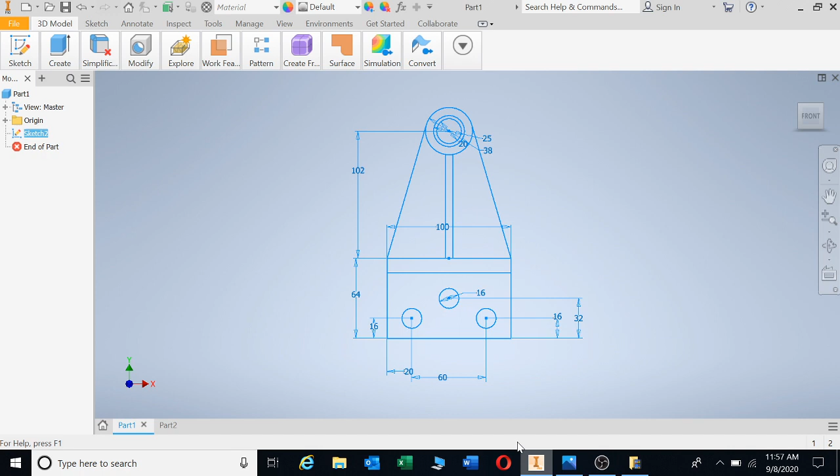The distance for it is 114, and then I need to get the gap in between there, which is 114 minus 12 and minus 12, which will be material that I put back. Okay, so let's go and do that quickly. I'm going to press E for extrude. 1 and 2. Let's get a better view, and that's the distance, and I'm saying okay.

I know I'm looking for a gap there, a U. It needs to be in the form of a U shape. So I'm going to go and share my sketch, right click. It went to the drawn sketch there, but I'm looking for share sketch here. Let's say escape, right click, share sketch, E for extrude. I'm clicking on the bottom because the top part needs to go right through.

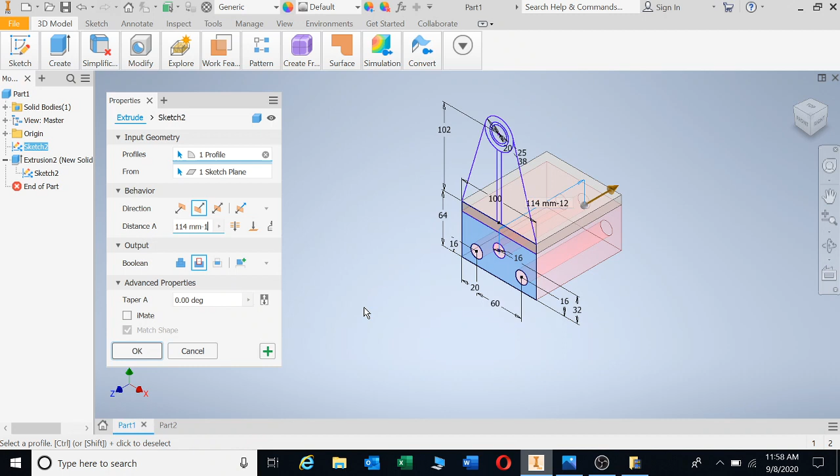So the bottom part will go in that direction 114, but I need to come back by 12 to get a one leg. So I'm just going to type in minus 12 in here, minus 12, and it will put back my leg there. Okay, E for extrude one more time, clicking on there, going in that direction. I need this time only 12, and that will put my leg in there. Okay, now that's what we have so far.

Going back to our drawing, you can see that shape was extruded 3 times. The first time we went from there to there and it gave us a solid block of 114. The second time I only extruded this rectangle there because I needed this gap here. Okay, and I can see I'm looking for a leg of 12 and a leg of 12 there. So I went out by 114.

I needed to come back by 12. So 114 minus 12 will give you a piece of leg there, and it will cut out that whole piece there. Then you press E for extrude again, and it will put this piece back here. And that's what we've done. We're going to do the very same with this. You can see these side flaps there, these side wings there.

If we go straight across, we can see that the width is 12 millimeters and 12 millimeters. There's 2 of them at the same height. The distance from there to there is the same distance from there to there. They normally match up these distances to be able to see the thickness. So you look at the heights, and then you'll see the thickness.

So the height from there to there and the height from there to there is absolutely the same, but the thickness is the same. So what I normally do, I don't mention that. I just go straight across, and you can see that is the object sticking out there. These cylinders going straight across, we've got 1 and we've got 2. Okay, but let's first focus on these 2 side wings. Okay, it's 12 millimeters each and a gap in the center.

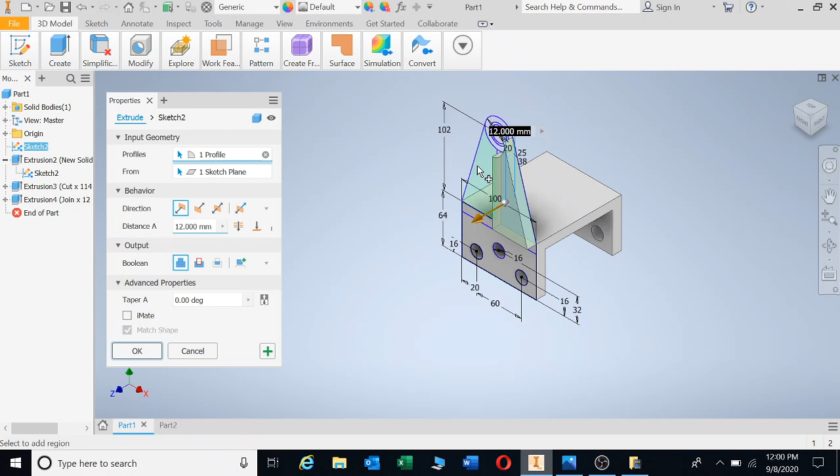So I'm going to click on extrude here, and I'm going to select the side wings. I'm going to extrude all the way from this distance to there, which will be 108 minus 20, and from this side it's 10. So it's 108 minus 20 minus 10, that is 78. So let's extrude that. E for extrude, going in that direction, and we're having 78.

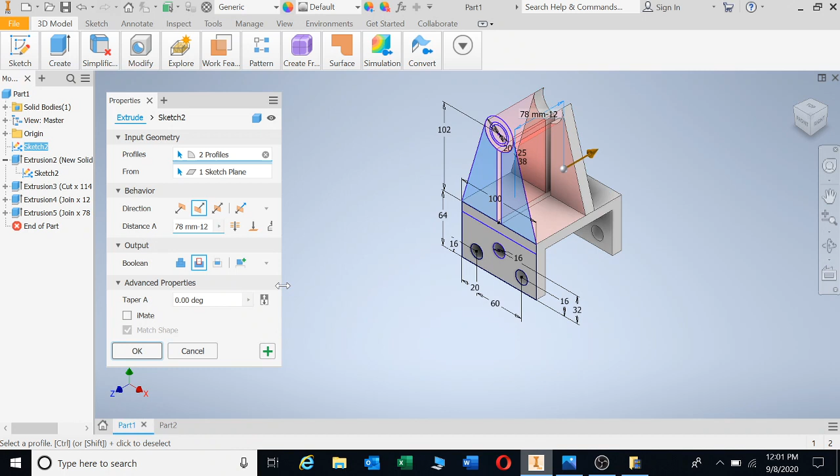Okay, if I extrude again, I need to take material back now, clicking on the very same shape, going out in that direction. I need 12 millimeters to be left, so I'm going to say minus 12, and there's my leg. Okay, again, if I extrude again, I need to put my 12 back for the front leg.

12 and in that direction and OK. I'm going to put in the rib in the middle. I'm going to go look at my drawing. This rib is actually cut there and cut there, but I'm going to put it in as a full extrusion from this point to that point. So it's 114, that's where it stops, and that's where it stops, plus 20. So it's 20 plus 114, and I'm going to put it in as a solid rectangle. I will go draw on it on the side afterwards.

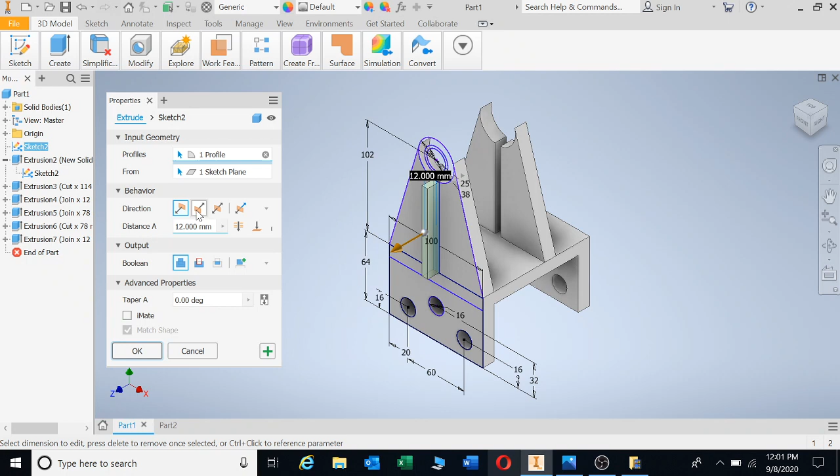If I extrude, selecting my rectangle, I first need to go in that direction of 114. Okay, and then I'm coming frontwards. If I extrude, it needs to come frontward 20 millimeters. And okay, I will draw on that later on the side. Then I am having this section here on top.

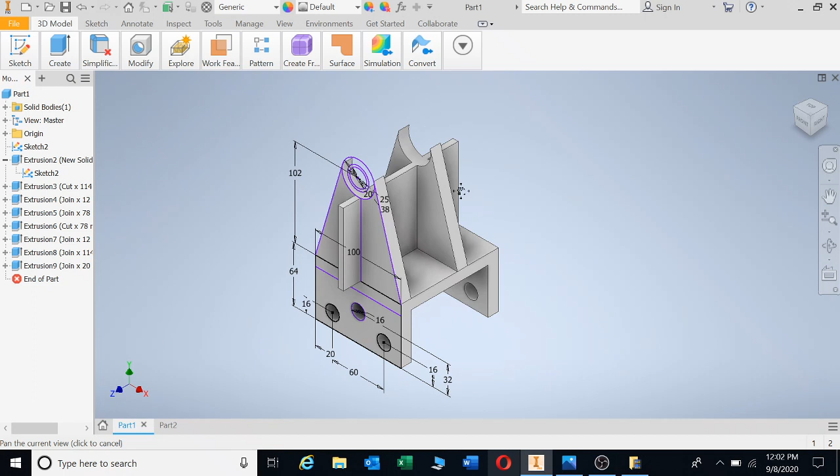I've got two cylinders. Let's look at our drawing first. We need to extrude in that direction, which is 108 minus 20, as you can see, because we're on this line here. That's where we're extruding from. So we're going in that direction. It's 108 coming back by 20, and it will give us that distance. So it's going to be a solid cylinder, and then I'm going to put 20 back.

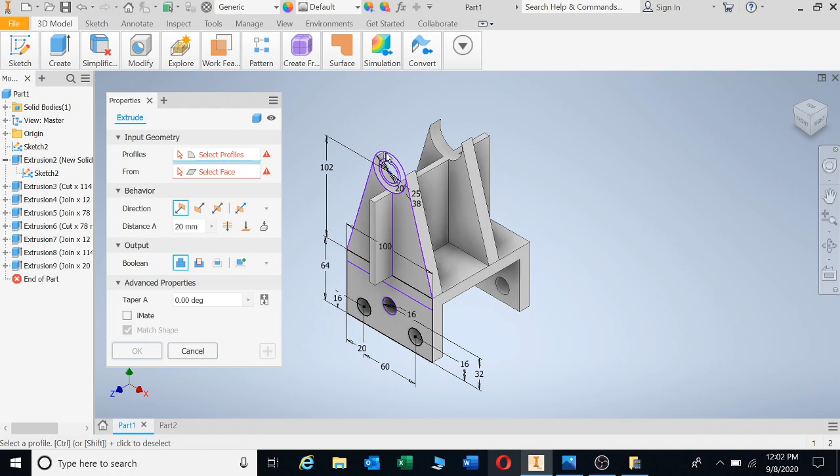If we extrude, I'm clicking on the shape there and on the inside shape, going in that direction, and I'm going to say 108 minus 20. Sorry guys, let's just look at this again. We're going out here, we're extruding from here. It's 108. We are already extruding from this point. We don't need to include 108 minus 20. We're working from this point.

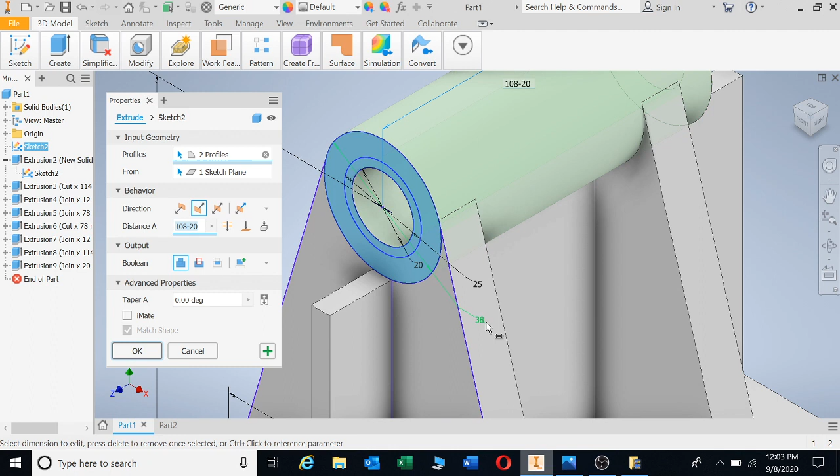So we need to go out in that direction. Yeah, that's fine. Now it's 108 minus 20. Sorry about that. I also get confused as well. So that's fine. There we have it. And that's our cylinder. And I'm going to say if we extrude, and I'm going to try to get that gap now.

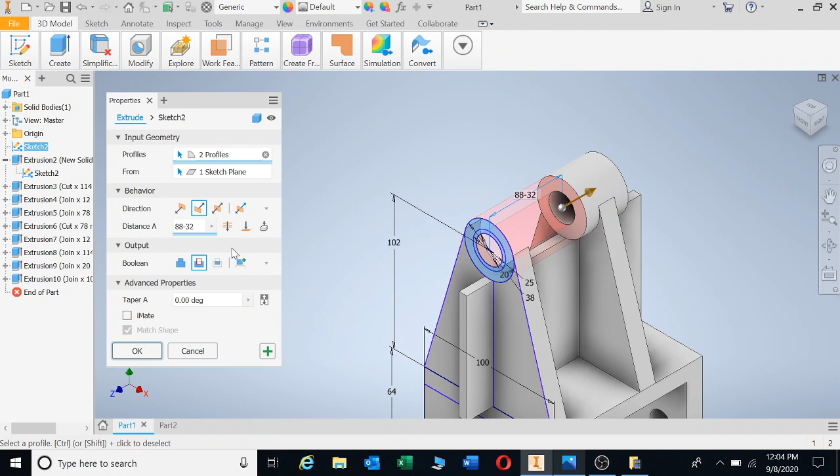First of all, I'm going in that direction, and I need to come back by calculation by 32 millimeters. Right. So it will be that small distance there minus 32. The distance from there to there is 88, if you take away 20 from 108, so the distance is 88 minus 32. So let's go and do that. 88 minus 32, and we have that first part, and then there's the second one.

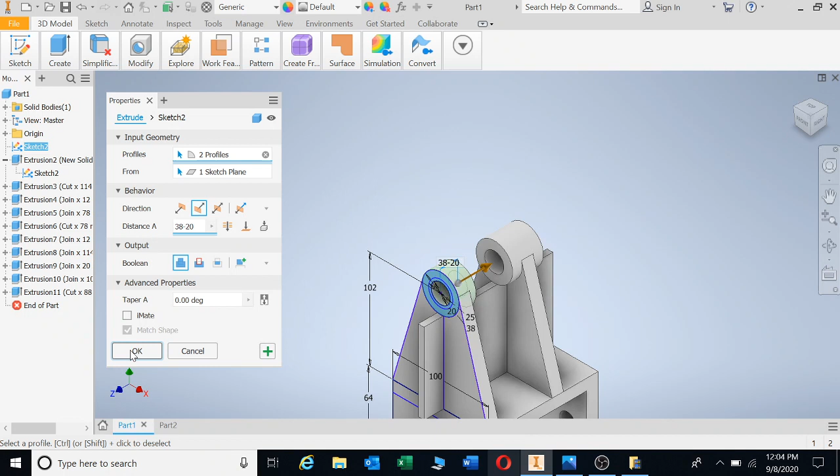If we extrude, I need to go in that direction, and now I need to find out how much do I have to extrude. Okay, we're only putting back that small part. It's 38 minus 20. We'll extrude that part in afterwards. So we're gonna go 38 minus 20, and that's that part there. And if we extrude again to get it to the front, the front part will be about 20 millimeters, as we've seen. That is what we're having so far.

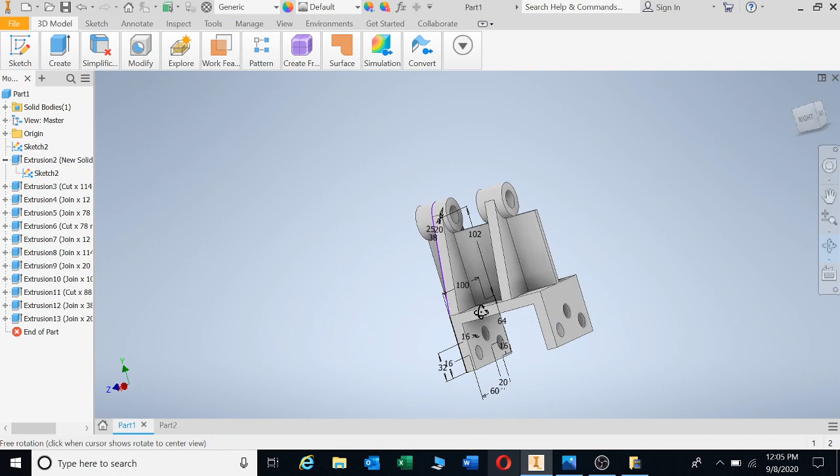Okay, looks good. We can now go and work on these parts on the inside, where you can go and sketch and be able to get your parts shaped down. So we need a hole in there 6 millimeters deep by 25. We also need this one there on the other side, 6 millimeters deep by 25. Let's do those first. We're going to create a new sketch. I'm going to click on sketch, 2D sketch, and I want to click on that face there.

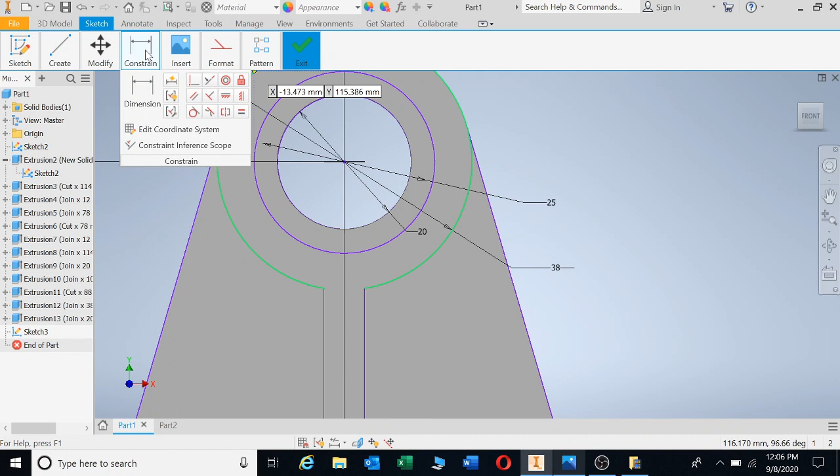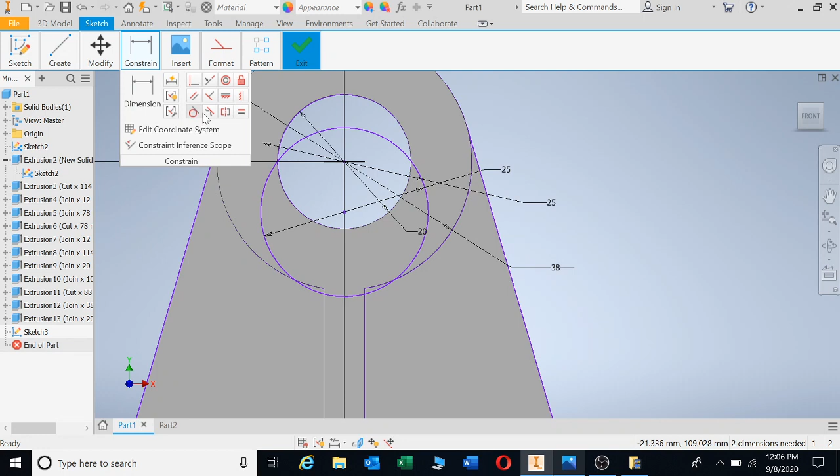Right, and I'm going to draw a circle. Need to get a center. And dimension 25 millimeters. 25. Enter. Let's constrain that down. Coincident. I want that part. Okay, we cannot find any point to lock it onto there. Right? So what we're going to do is just make it concentric with the other circle. So we're going to say concentric, clicking on that circle, and that one will take you to the center.

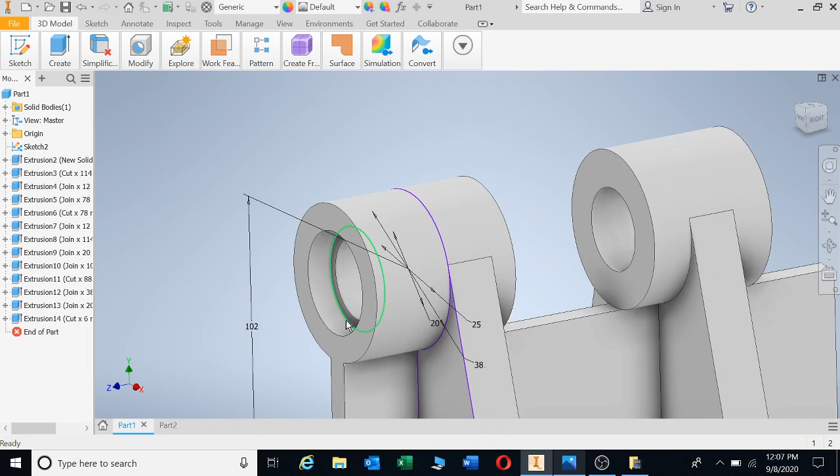So if we extrude, we're going back by 6 millimeters, and because it's showing red already, we don't need to click cut, and it will cut by itself. And that's the hole there in front. Let's turn to the other side. Press escape to go out of your functions. Click on sketch again. 2D sketch. Click on the face. And then draw another circle of 25 millimeters.

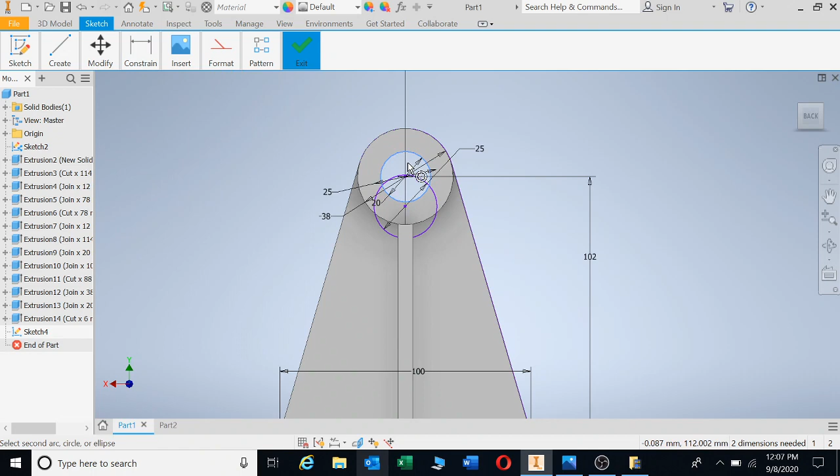Dimension it as 25. And there you have your 25 millimeter circle. And we're going to make that concentric as well. Concentric. This circle and that circle needs to be concentric. If we extrude, we're going to the other direction. That's why it's showing red already. It goes automatically to cut, and you click OK. That's done there. No problems.

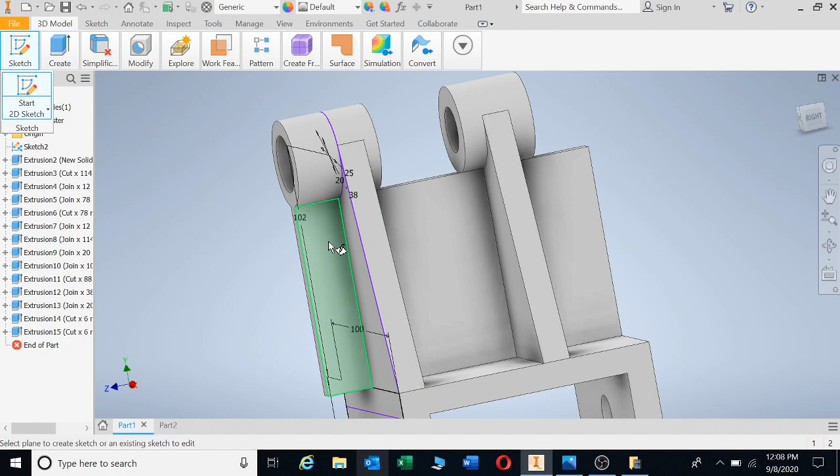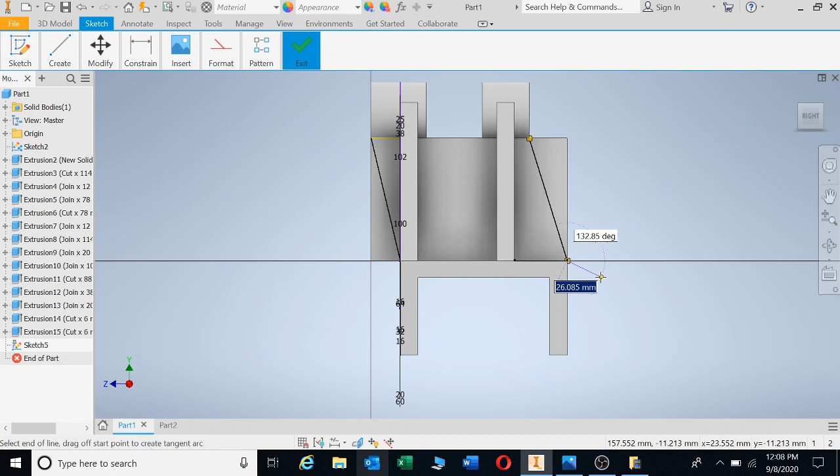It's done. Right, to be able to solve this here, we're going to sketch on this and say, right, escape out of all functions again. Click on sketch and click on there. And now we are going to draw our line from this corner upwards to there. Okay, escape, enter. We can also draw our line from there to that corner there. Yes. And then we also have a rectangular shape which starts somewhere from there to there.

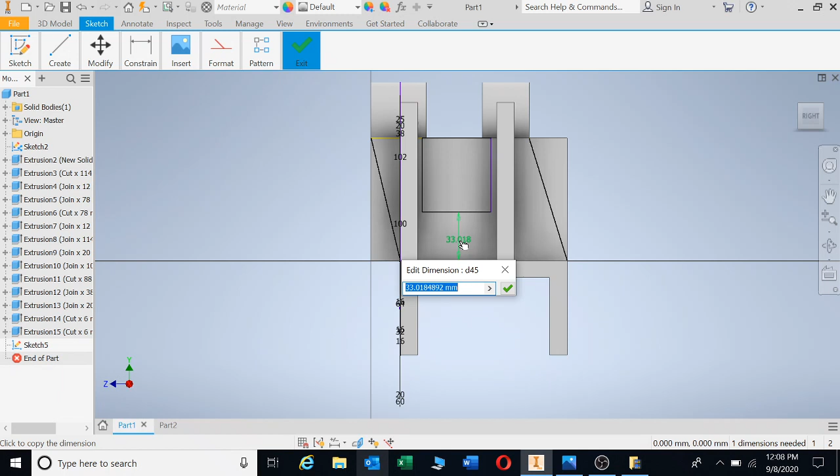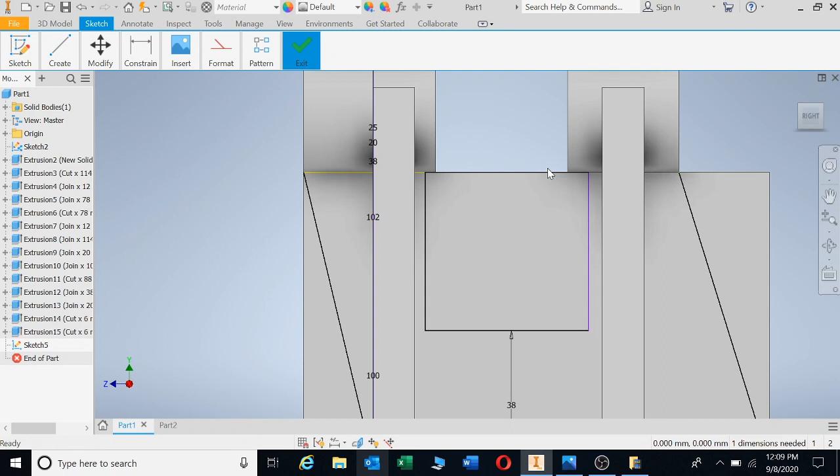Okay. And then you put in the dimensions for that rectangular shape from there to the bottom, which is 38. And that gives you the height as well. And this distance needs to be 6 millimeters because we have a radius of 6. Okay, instead of going there, we need to put in that distance there.

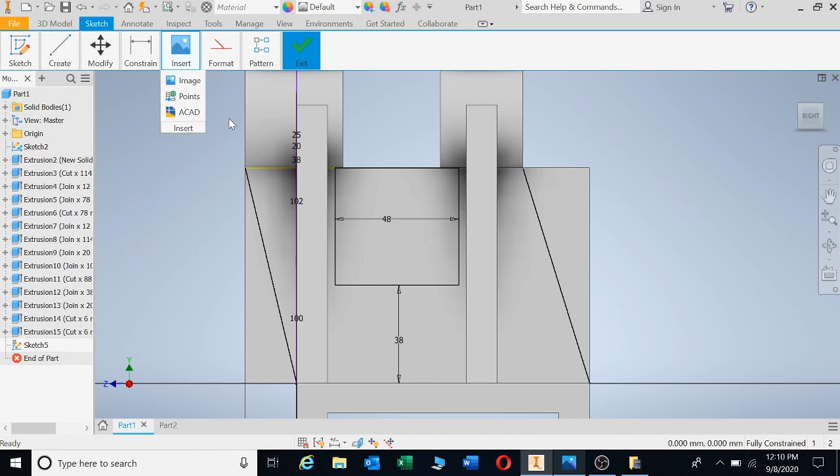Okay, let's say if we extrude and we're going to click on these geometries. I'm looking for that part there, but it doesn't want to. Okay, let's go to the other side and cut through there and say okay. Okay, and let's go and alter these sketches because it needs to be closed before it will cut. In the previous Inventors, it cut automatically, but now you need to close up these shapes. Escape, enter.

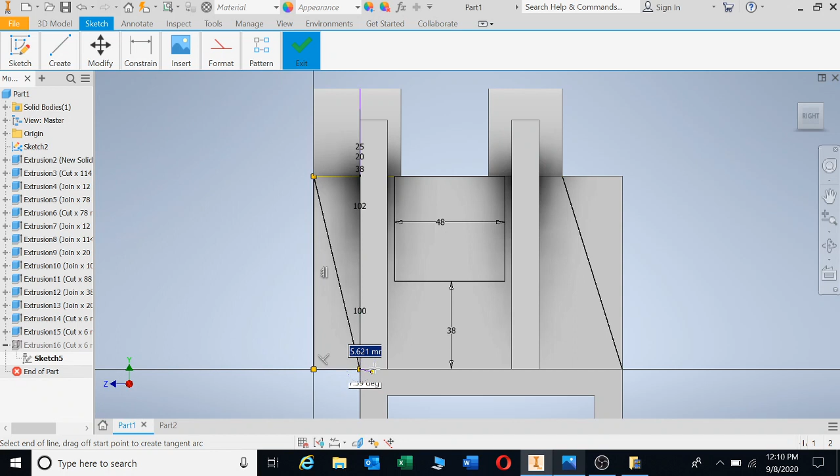If we extrude, okay, no, we have to finish, right click, finish the sketch. And now we can share the sketch and extrude. Share sketch, E for extrude, 1 and 2, let's cut and say okay. Okay, that's what we have. You can put in your fillets afterwards that you want to put in of 6 millimeters. And as you go along, you can do that.

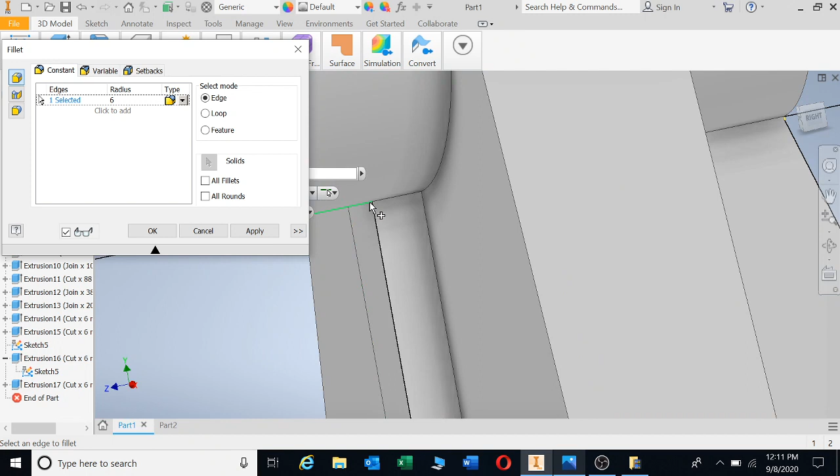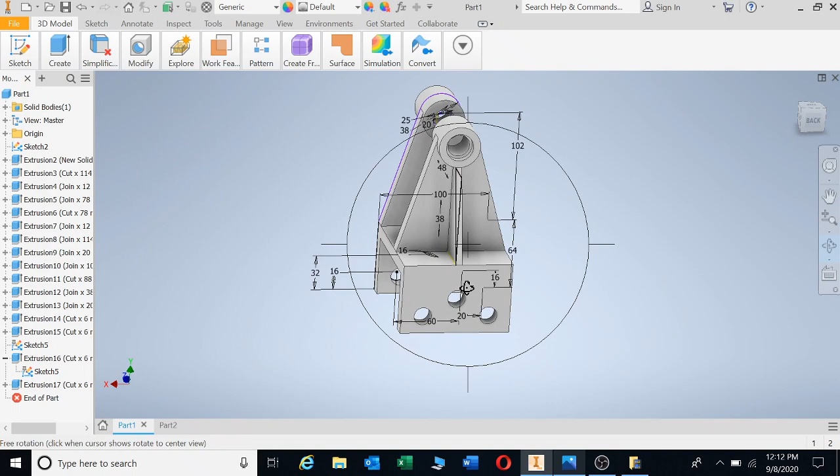Okay, that's the wrong place, but anyway, I know there's a little bit of a glitch there. But anyway, that's how you do the drawing. That is how you do your drawing. That's by adding material and putting back material. That's how you solve this problem. Okay, this hole also needs to be filled up. It's also very easy. You can sketch there and just extrude it closed.

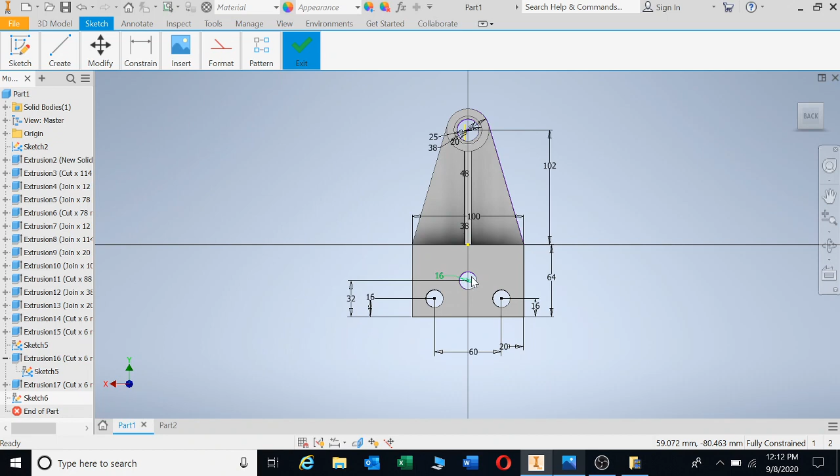You go click, sketch on there, escape, click on there and then sketch. New sketch on there. Okay. E for extrude. We just close that hole there first and put a circle over it. Okay, and then I'm going to make it concentric. Okay, and I'm going to make it equal so that it can be on top of one another.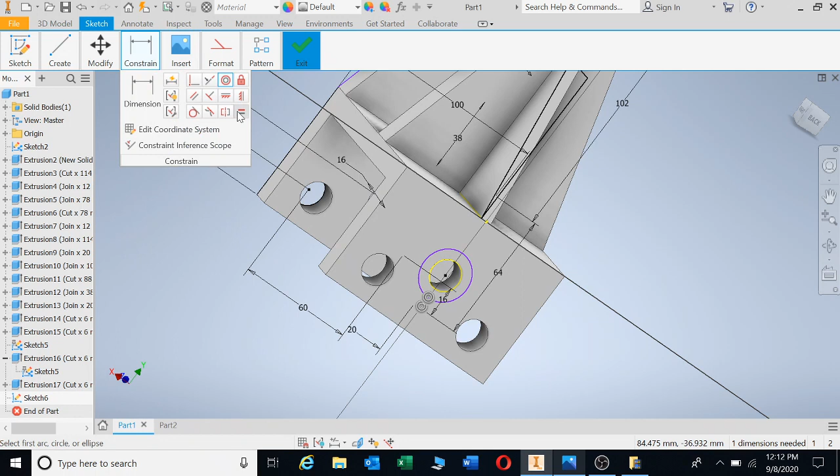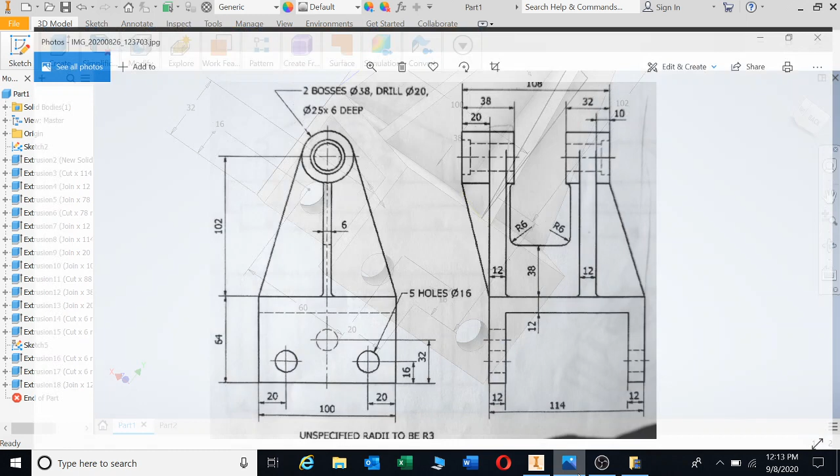And if I press E for extrude, I can click on the hole and I can fill up the hole, which is 12. And then the hole is filled up. Because we can see on the drawing, we only have one hole going through there and two holes overlapping there, more or less. And that is our drawing, ladies and gentlemen. We save this and press save. Okay, and that's it. Now let's go look at the work plane method.

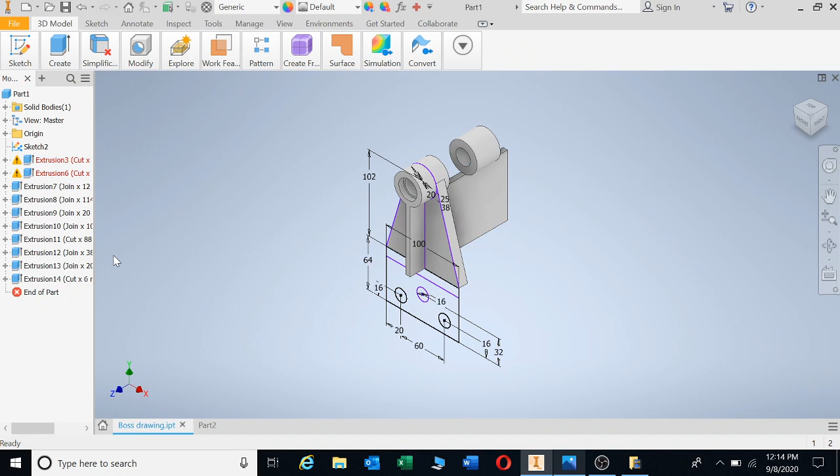I'm going to undo all the way. Let's see if we can get undo all the way. If we can't, we can right click and just delete. Right click, delete. Or I need a sketch to be able to work with delete. Delete. Delete. Yes. Try to keep in control. Maybe I can delete all of these at once. Delete. Good. Okay, now we are once again left with the sketch.

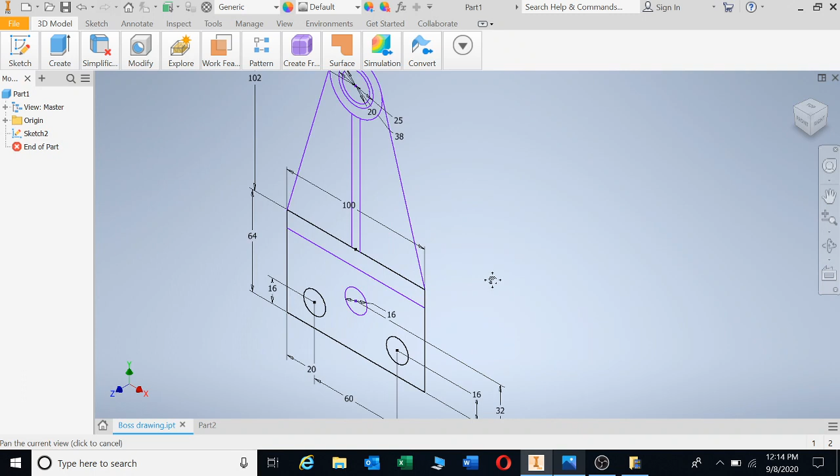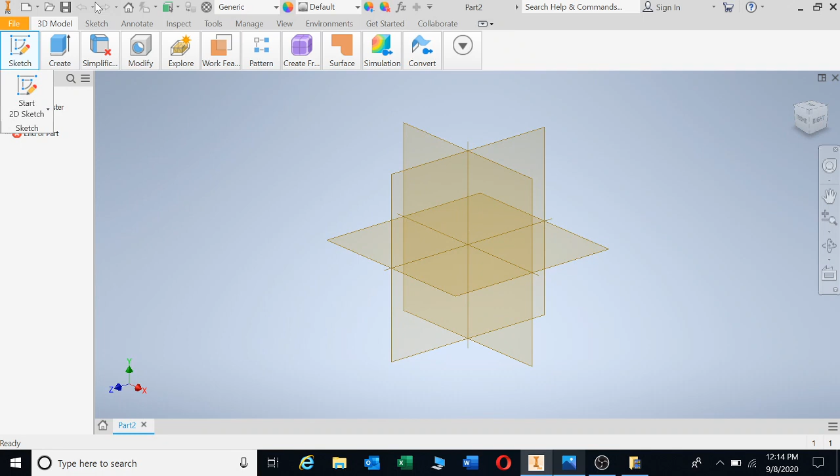Now what's going to happen here is that we will only be able to do the front part more or less, and then we're going to need to do the work plane. Okay. Let's say, for instance, let's leave the sketch. Let's rather leave this one and start with another one. Sketch XY, and there's my rectangle 1, and then I have another rectangle 2, and I'm going to dimension these 114, 114.

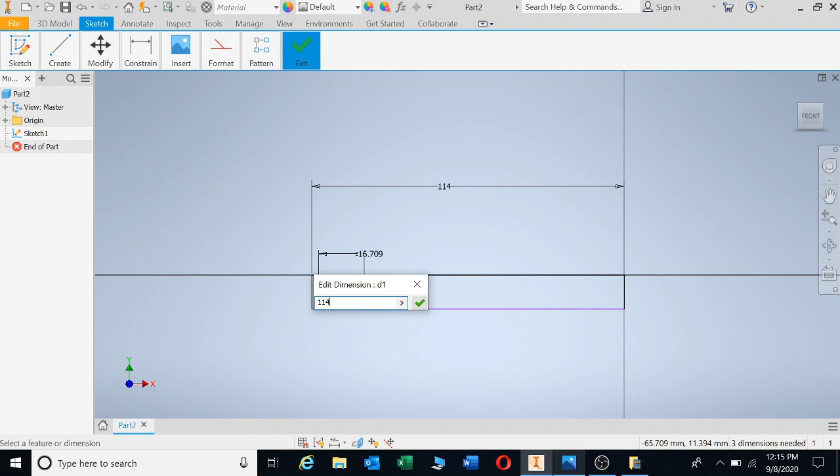Okay, this one will be 114 minus 12 for both legs. I'm going to coincident these lines here, center point to center point for that rectangle, and then we will put in the heights for these rectangles. The height here is 64. As you can see at this point, we've got a height of 64. So we're typing in 64. Enter.

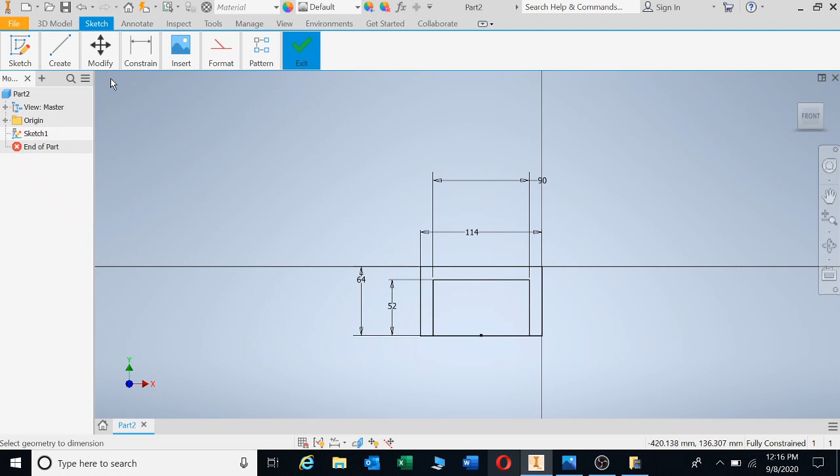And our height here will be 64 minus 12. 64 minus 12, enter. And I'm going to trim now the bottom part. If it doesn't want to trim, just click on it and press delete. E for extrude.

Since I've drawn that side, my extrusion distance is straight across, which is 100. The length there is 100. So I'm going to type it in here.

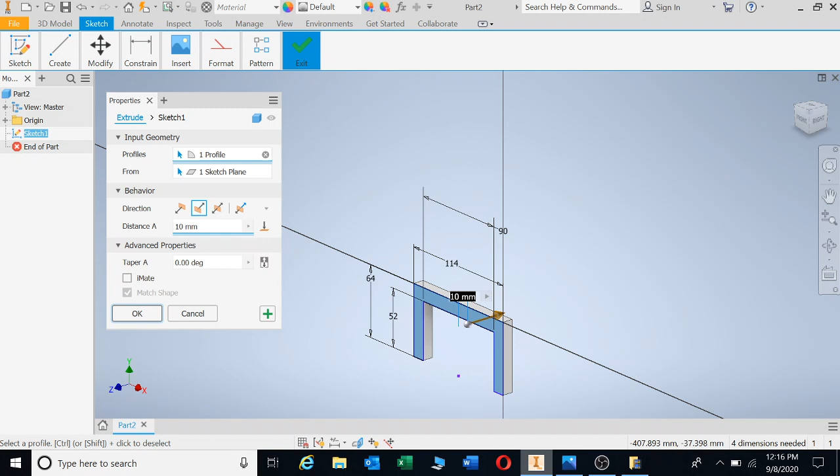And that's what we have. Now, this is step by step working. Now I can go and click on sketch again.

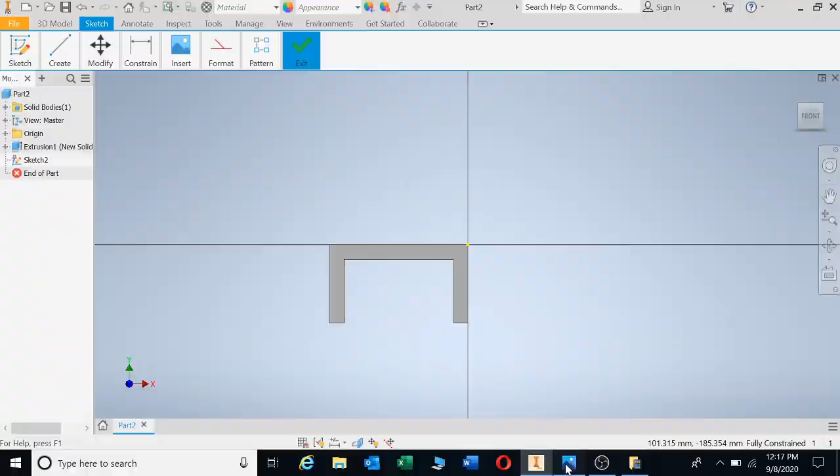I want you guys to look at this. And I click on that face there. And that face suddenly looks like this part there. I can either carry on sketching there, but I can see it's not appropriate because we're having an inclined surface there. It shows you, right? It looks flat there, but if you go straight across, it's inclined.

So we need to start from this side here, and then I'm going to draw all these in front. So I'm going to rotate this, and I'm going to right click and finish that sketch. I'm not going to use it. I'm going to right click on this part here and delete the sketch. I don't need that sketch. I'm busy with sketch number 1.

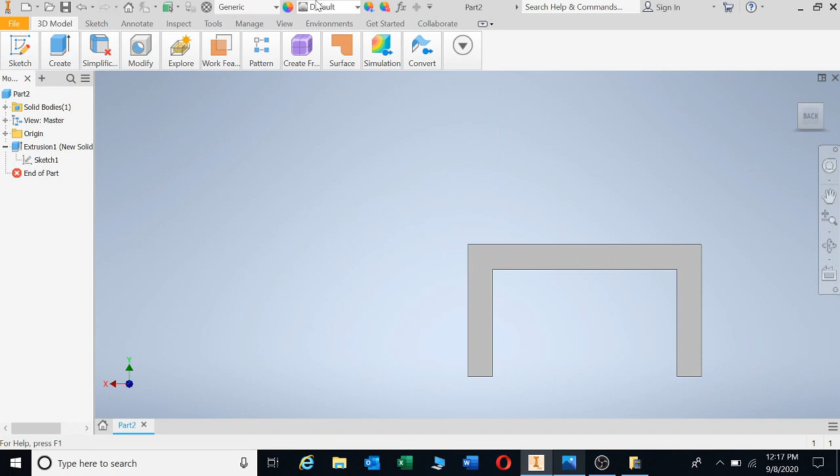Let's go sketch, and I'm clicking on the front. Let's go and draw this here. Okay, the height is 102, and then we've got 3 diameters, 38, 20, and 25.

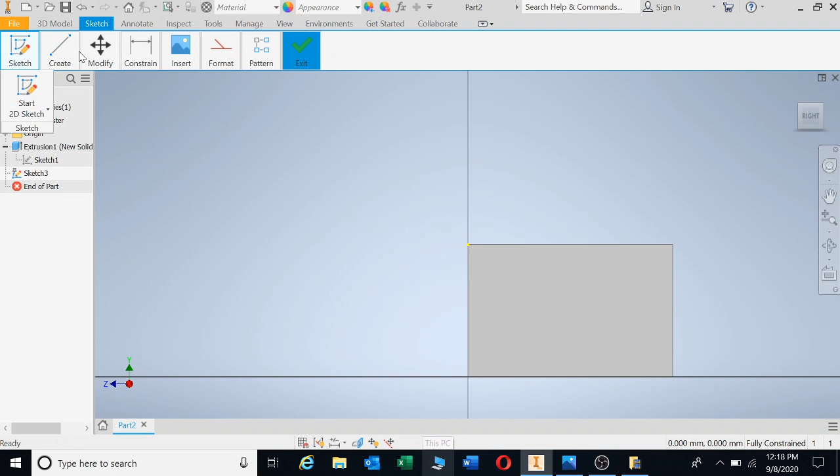Going to start with a rectangle to be able to get the top part there. Make sure you're on the line. Here we have that part. And then I'm going to put my circles in the center here.

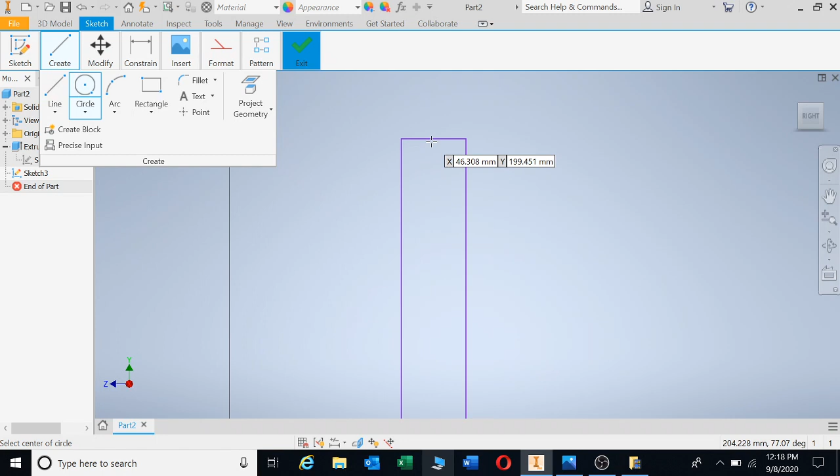There's 3 of them. One, 2, and 3. All of them concentric. Let's get this in the center. Coincident. There it's in the center.

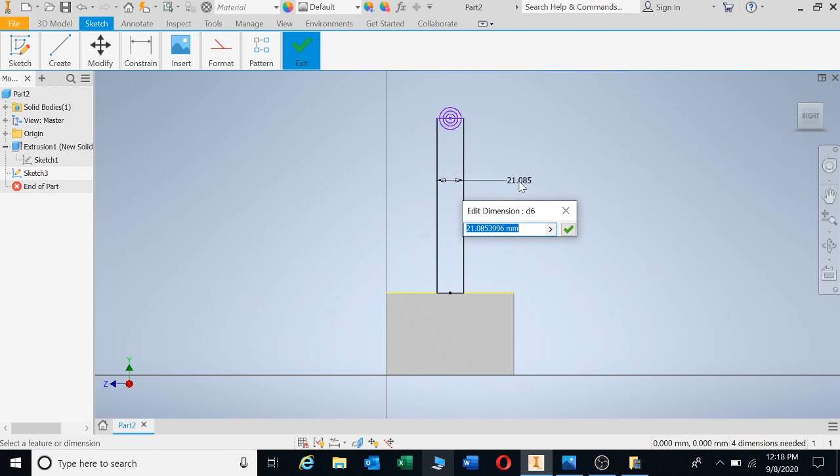The width there is 6 millimeters. We've got a 6 there. Enter. And now we can put in the size for these circles.

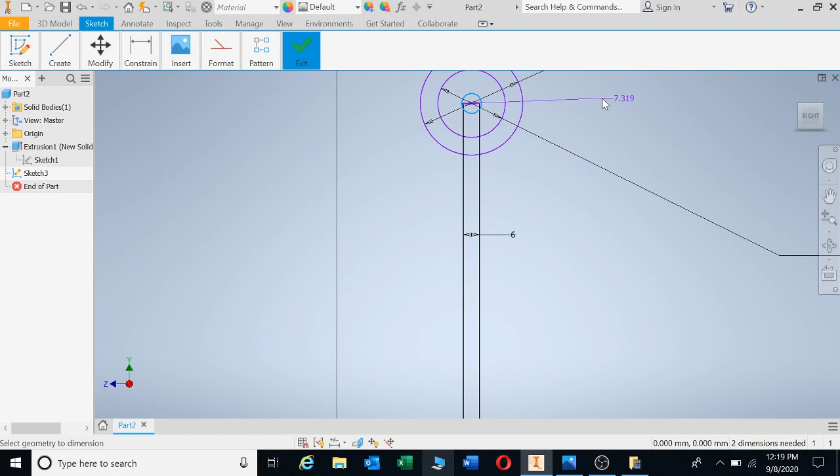We've got 38. We also got 25. And we've got 20. To 0. Enter.

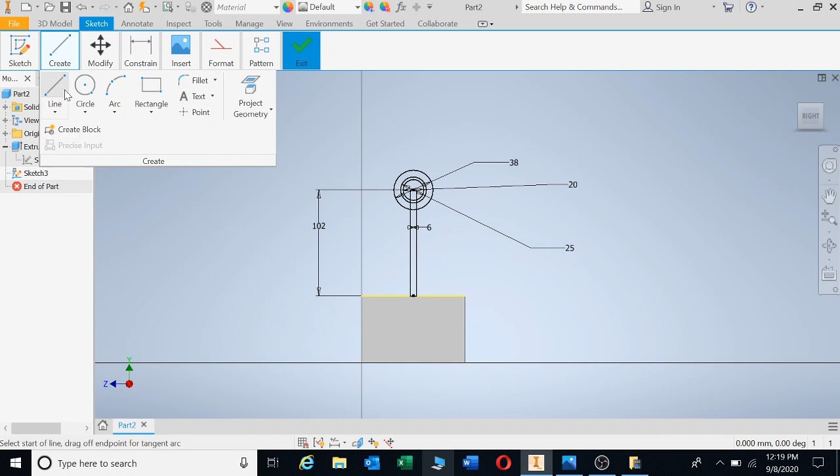That's what we have so far, and now I'm going to put in the distance. The distance from this line to the center point there is 102. And I also know that I am having from that point...

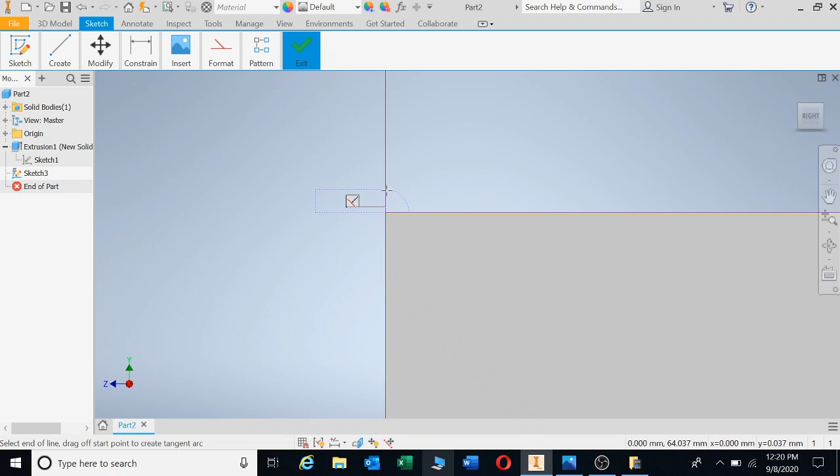I just need to make sure if that point is connected there, because I haven't seen any connection. Looks like it. Okay. And I'm going to tangent these. Escape and enter to be able to get my sketch again.

Right, and I'm going to go out to my tangent. 1, 2, 1, 2. And I can go trim. We also need to trim these so that we can extrude properly. And that's what we have.

Now we can go for our second extrude. The second extrude is these flaps. I'm going to extrude the flap there. And then I'm going to extrude another time, which is this small piece there. And then a third time, which is that small piece there.

And then I'm going to create a work plane here to be able to extrude all that in there. And then finally, this will also need to be extruded as a solid rectangle and then cut out eventually. So watch this.

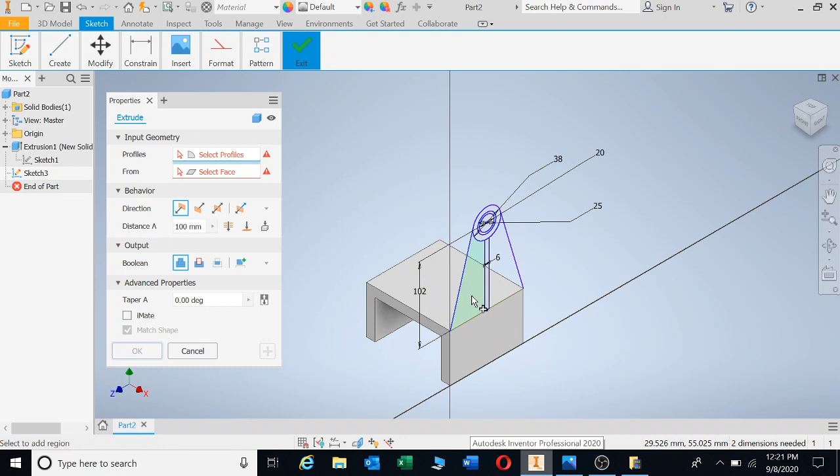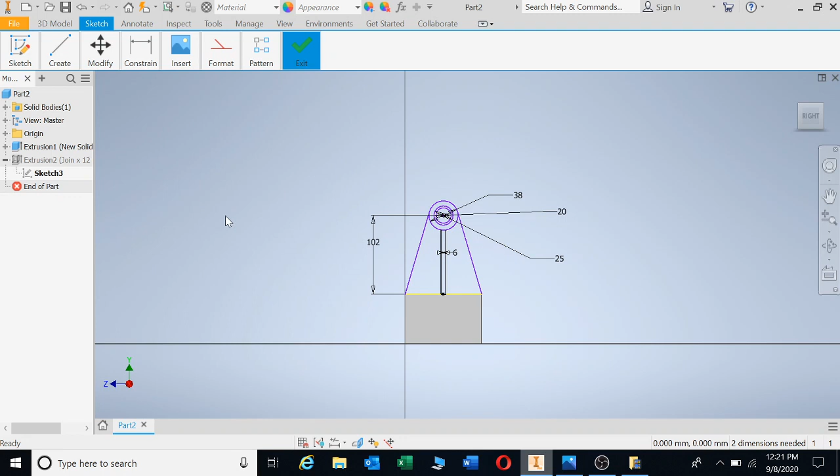We got 12. Okay. Let's go share the sketch. Okay, see it is sketch on there automatically. Escape, right click, finish sketch. For some reason something is just escape again.

Share sketch. Right. Now I'm going to do the cylinder. E for extrude. This is our front cylinder, and our front cylinder is a distance of 20 in that direction and 18 backwards.

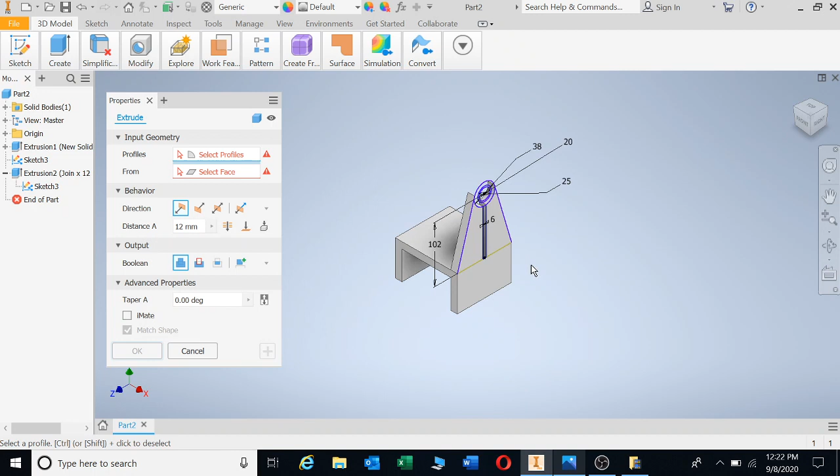So E for extrude. We've got it. Let's go do that cylinder there. That's the wrong one. Keep in control. Keep your control in and deselect that.

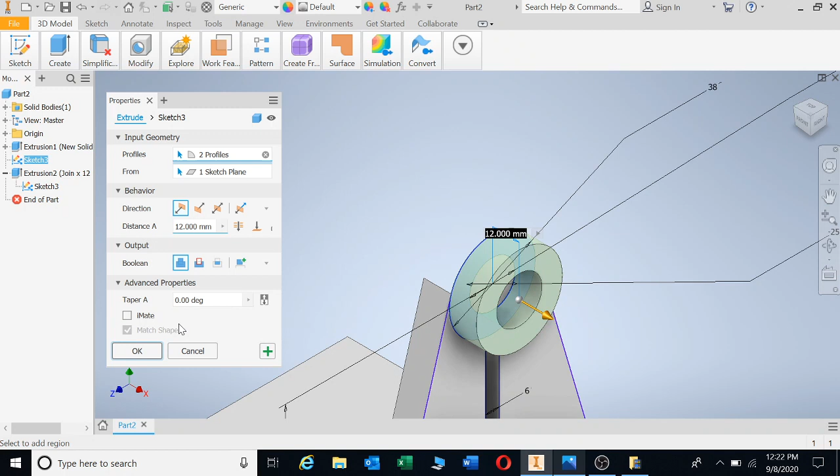Okay, there we go. We've got that part there. It's going frontwards. We need to go 20 forward. So 20 and OK.

E for extrude again. We've got 1 and 2. But we're going to the other direction and it's 18. And we say OK.

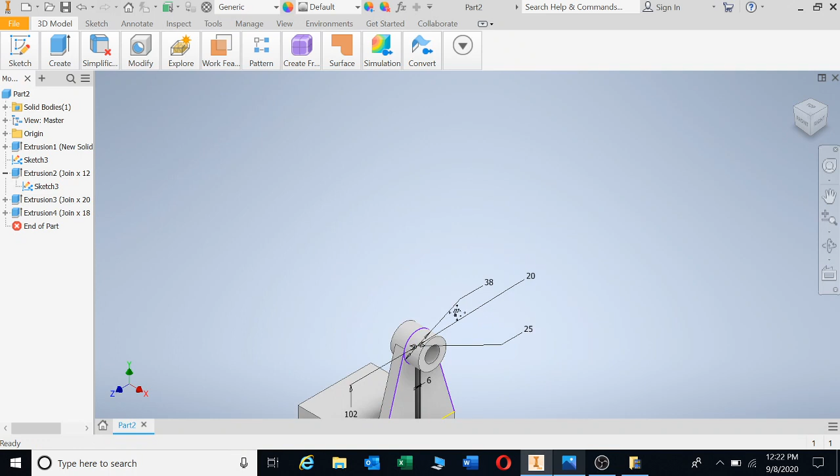Now what's going to happen is we're done. And we now need to go create a work plane, guys. You go to any flat surface where you want to create a work plane from. And this is what we're going to do.

We're going to click on this surface and keep our left click button in. It's a line, but we know it's a surface right in front, around the corner. And then we're going to position this work plane up till there. So the distance from this point to there will be how much?

Let's see. Okay. We've got 10 millimeters plus 12. And then we have 18 millimeters. So that gives you a total of 40 millimeters. From here, from here to there, we have 10 millimeters plus 12.

Let's first get this distance from there to that point. 108 minus 20 is 88. So we've got 88 from there to there. Coming back by 10, we've got 78. Coming back by 12, we've got 66. So the distance from there to there is 66.

So let's go in and put it in. I'm going to keep my cursor on there. You can see the surface is turning green, and I'm going to keep in my left click button. Here it comes. Keeping it in will help you to create a work plane.

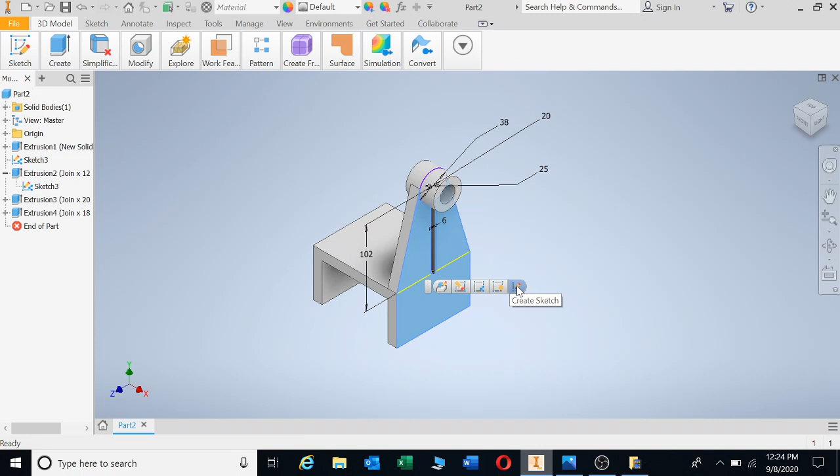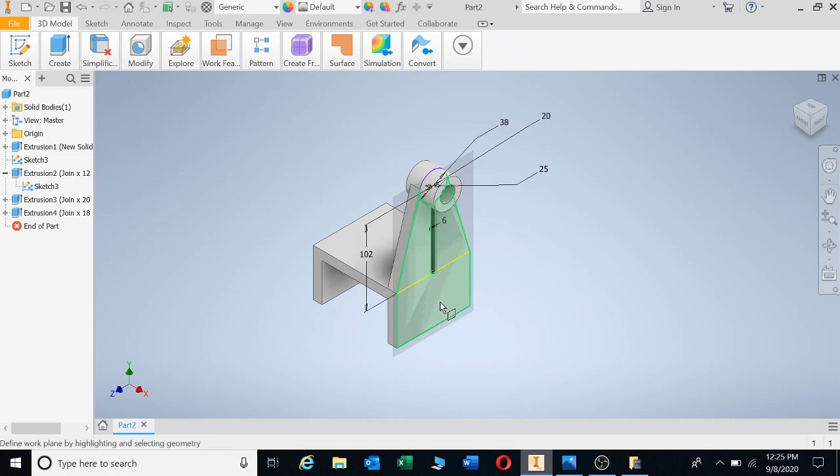Okay, click on work plane. Click on work plane and keep your button in there, it will give you a distance. Again, left click on work plane and click plane. Now keep your button in on that face, and you'll get the distance. So the distance is 66. It's going this way, so we're going to put a negative in front to go the other way. And I'm going to say yes, I'm happy.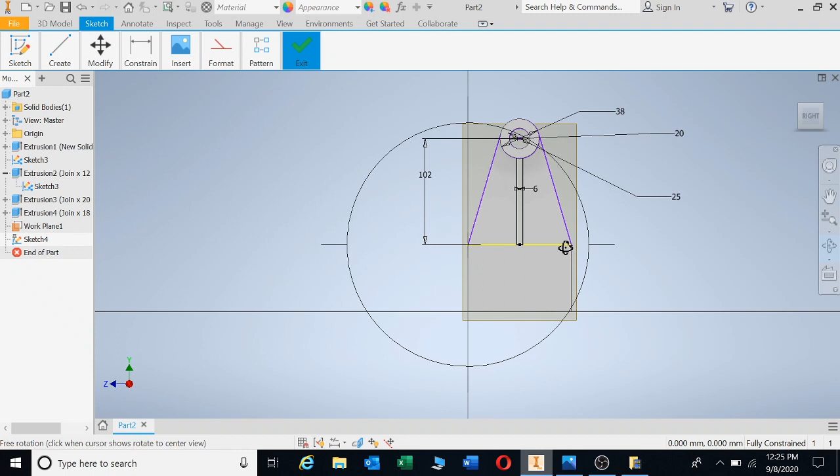Now I'm going to sketch on there, sketch on that work plane. We already have geometry here. Here's the geometry, I'm not going to redraw it on that work plane.

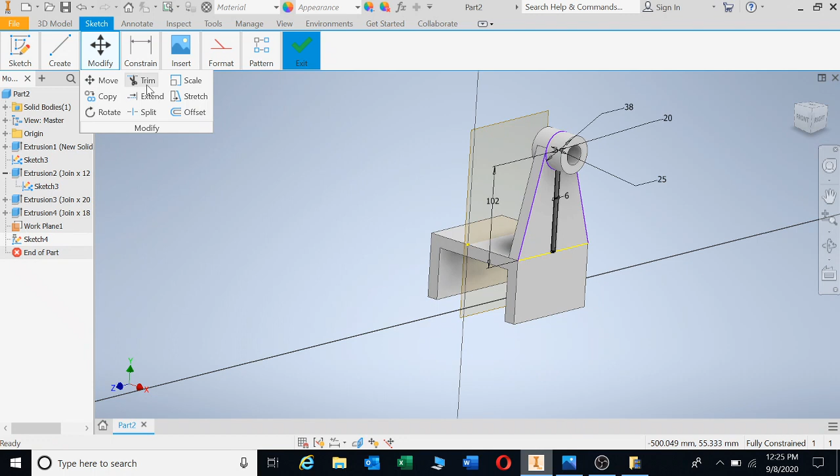So there's something we need to do called project geometry. Let's just go look for the symbol for project geometry. It's somewhere here, under Modify. Project geometry, there we have it.

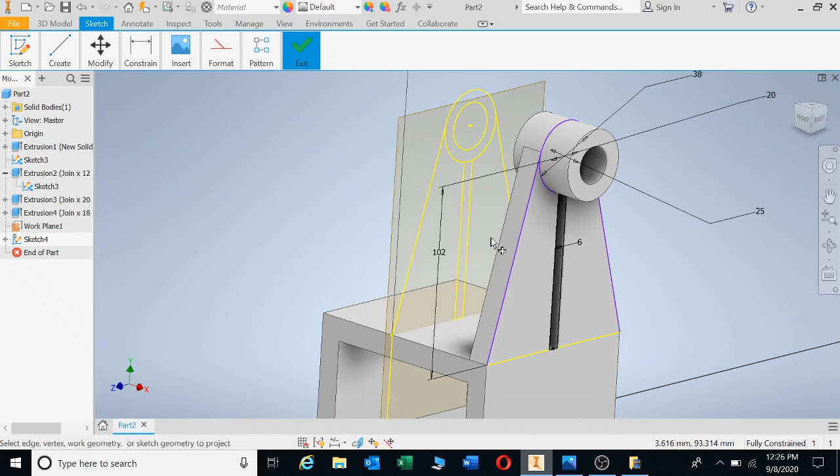We want the geometry tree to be projected onto the plane, the first one. So I'm going to click on all this geometry and it will go to the back. All of it will just appear to the back, right? And there we have it. Even those lines there, all of them are at the back.

Now I can extrude straight away. Right click finish, and I'm going to press E for extrude and click on my first wing, second wing, and let's first go see does it need to come forward or go backward.

Okay, so let's look at it. We went from this point to that point, so it needs to be extruded to the back side. So moving it to that side, which is 12 millimeters, and we say okay.

Let's go look at the cylinder. The cylinder needs to go out - we're now sitting here at this point that we're working from. The distance from there to there is 22, and it's 10 this way, so it's 2 extrusions: 22 that way and 10 this way.

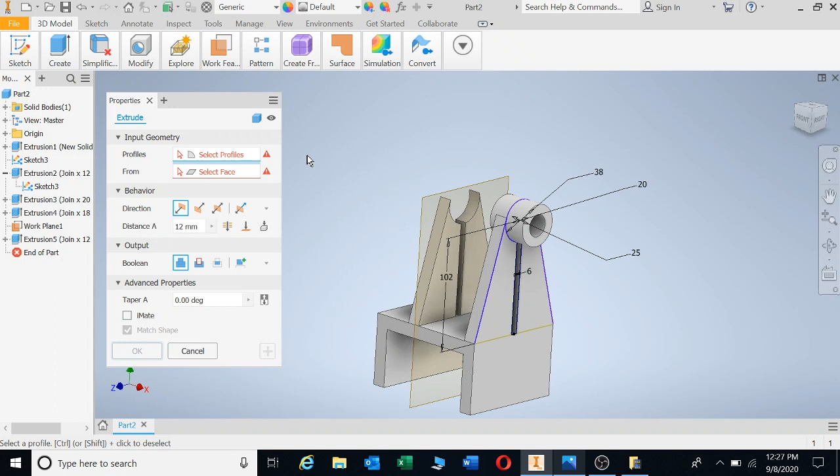E for extrude. Let's first go share the sketch. I think yes, share sketch. E for extrude. The cylinder needs to come 10 millimeter this way.

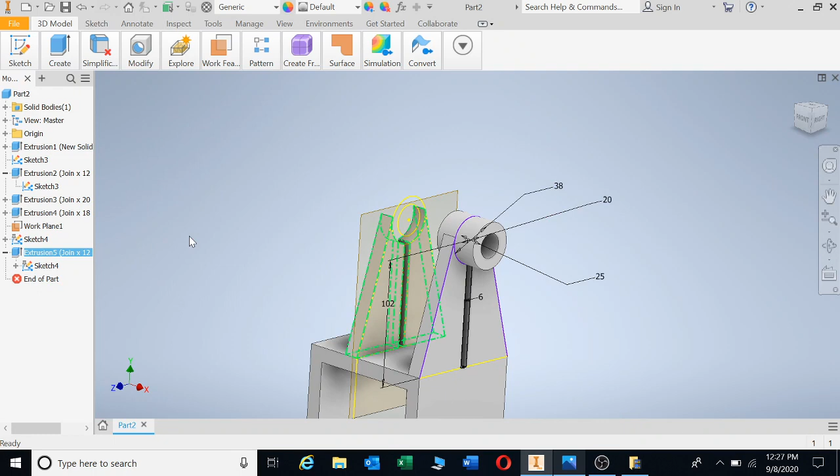We need, before we go further, to just double click on the sketch first again. It needs to be another circle that I haven't selected.

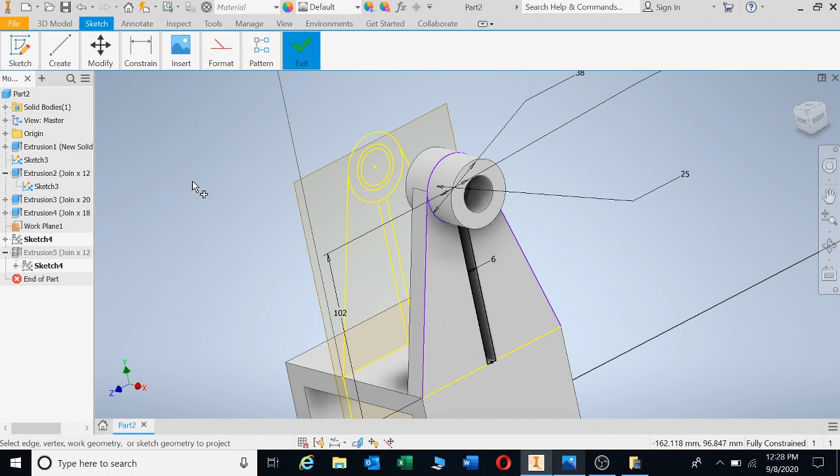Project geometry, let's see, here's a small circle - that's the one. Thank you very much. Right click, finish, E for extrude, and we're having one, and then that small part there, and it's 10 millimeters.

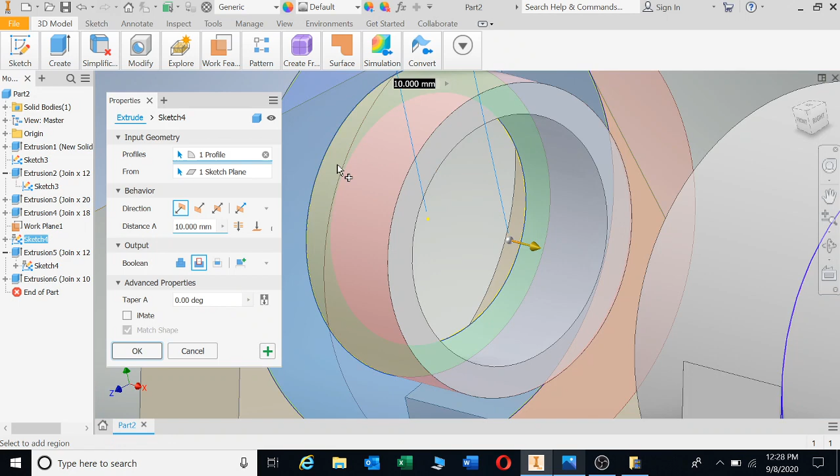Okay, E for extrude again, back part, and then we're going to select that small circle. We're going to go in the opposite direction, and that is 22 millimeters.

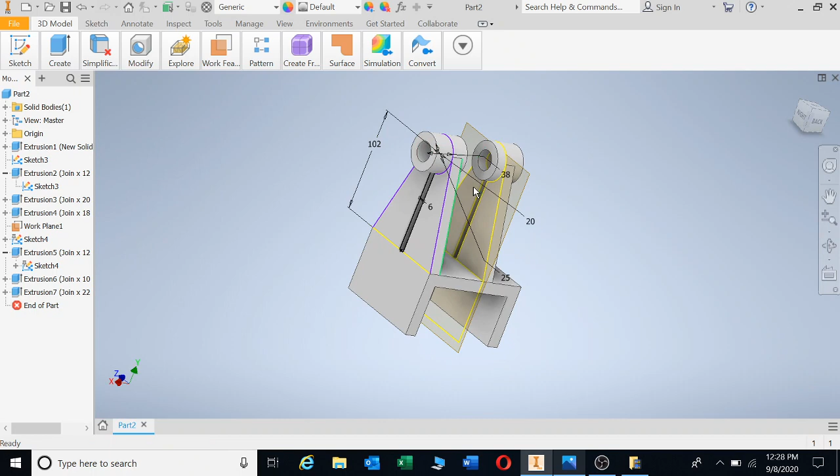Okay, at this point I think I should stop, because the only thing left is the part there. You're going to need to do the same as I've done with the first drawing, to be able to sketch on there and go in 6 deep, and on the other side.

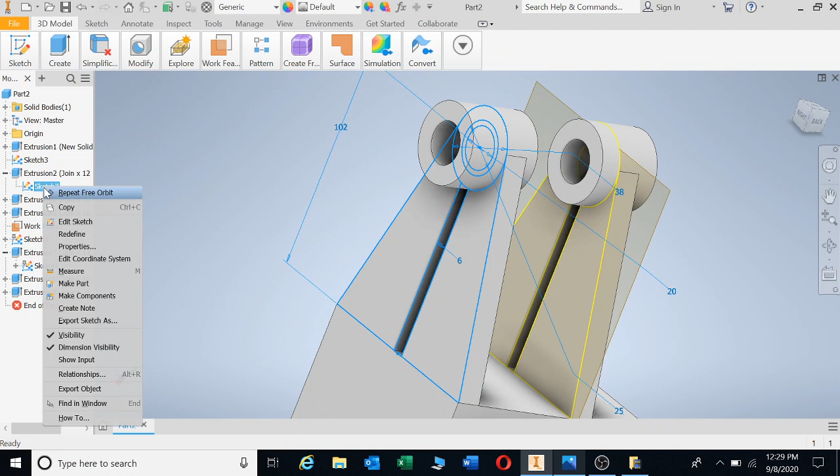Let's look at the sketch here, the first one, the sketch where we can extrude from. Okay, you can see it's highlighting there, so you can right click on that sketch. Let's say E for extrude, and I'm going to click on that little shape there. There's the shape, can you guys see that?

Okay, and I'm going to come forward right up till there. I don't know the distance, I'm not going to calculate it. So what do you do? You click on this little button here, say To. You don't know the distance from there to there - you can calculate it, but it's easier to say To. So you click on To, and you're going to keep it on that face there. You want it to go up till there and say okay, it will stop there.

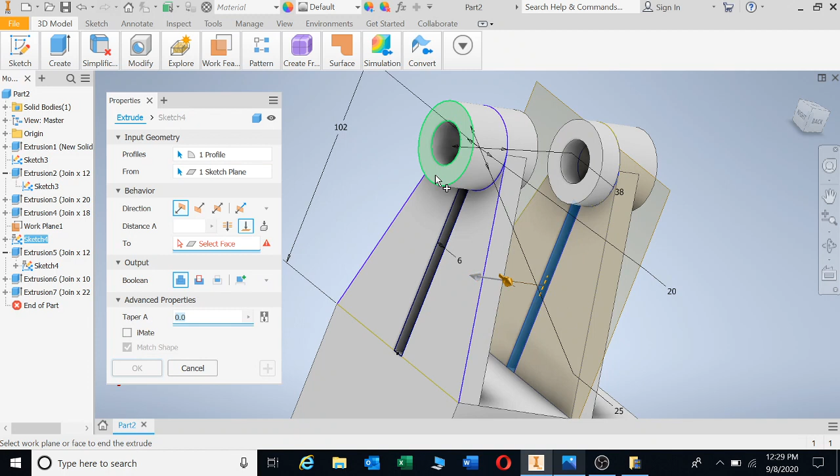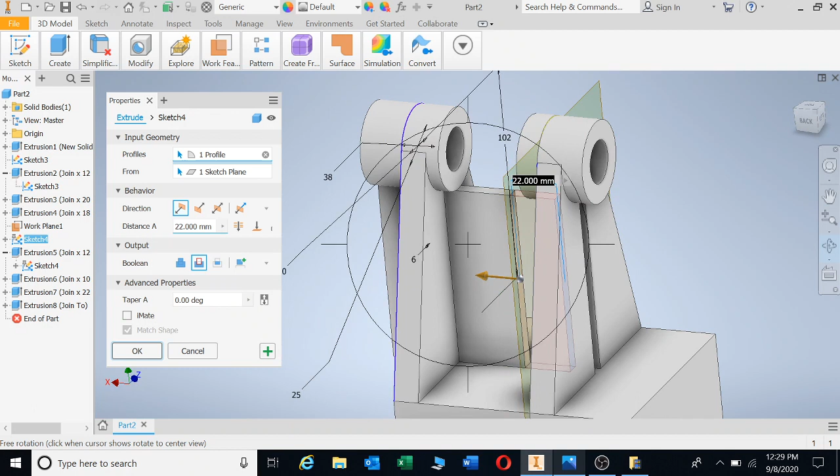You can also go to multiple extrusion, but it's better to do it again. E, okay, and E for extrude again. I'm going to click on that little face there, and I'm going to turn my drawing, and I'm going to say I want this thing to extrude to that face there.

Now remember, you can also type in an angle and your extrusion will become angular, right? But you don't want that, you stay on 0. Okay, and then on the side of this drawing, you will now sketch your rest where you can get your final shape.